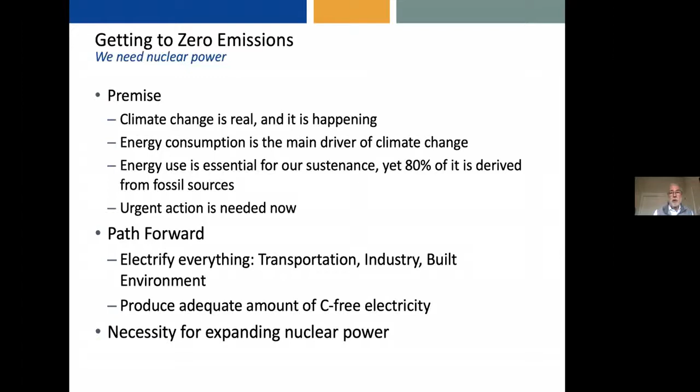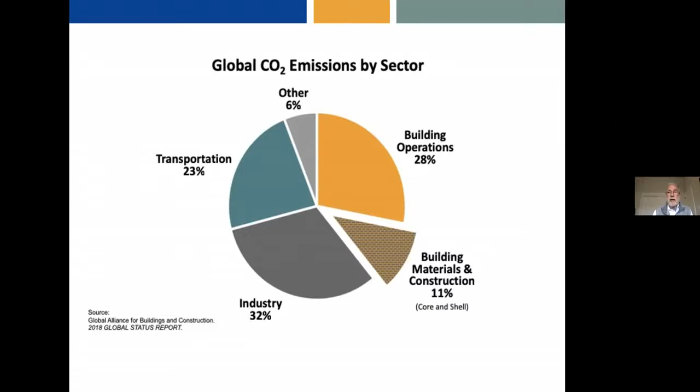And by the time you get to that, the per capita energy consumption at the country level has to be the equivalent of about 1,000 gallons of oil per year. This is for all energy, not just the gasoline for driving cars. I've taken the primary energy used in any country and expressed it in gallons of oil equivalent on an individual basis. That made a little more sense to me. You can find more about it in my other works. I'll talk about that. So that's what we want to get to.

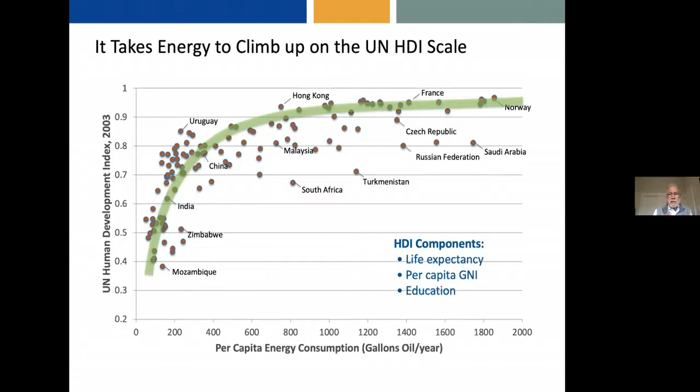So let's estimate what the energy requirement would be by mid-century. Let's assume for this analysis a population of 9 billion people. And if the desired per capita energy consumption to ensure an HDI of about 0.9 is 1,000 gallons of oil equivalent per year, which is still about half the consumption of the US, comparable to that in Europe and Japan, it translates to about 9 trillion gallons. Or, for those of you who may have seen my other works, the cubic mile of oil, my other favorite unit, it's more than 8 cubic miles of oil worth of energy.

But we are talking about it going all electric, so I'm going to dispense with the gallons and cubic miles and go straight over to electrical units. So in an all electric scenario, we would take the 9 trillion gallons and then try to convert that into kilowatt hours. And I'm going to use the exergy part of it. And in that analysis, 1 gallon of oil is not equal to 40 kilowatt hours, but only 12 kilowatt hours. That means for 9 trillion gallons, I need about 108,000 terawatt hours. That's about 4.5 times the current global electricity production.

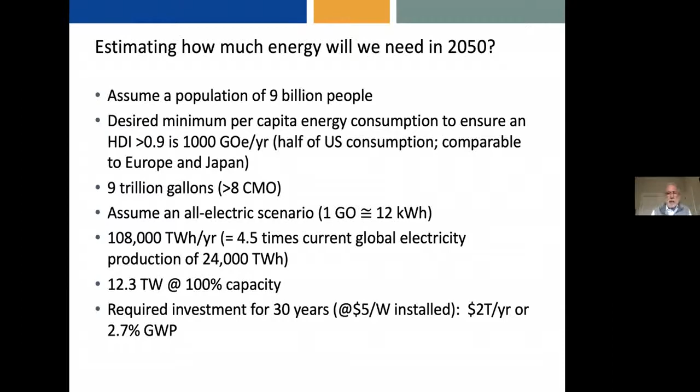But one of the big challenges for an all renewable scenario is that wind and solar are intermittent sources. The capacity factor, that means the time they are up and running, is less than 30%. And that increases the requirement for the installed capacity. So instead of installed capacity of 12 terawatts, now you're looking at between 30 and 40 terawatts. And second, these sources require a lot of materials in terms of iron, steel, concrete, glass, all kinds of basic raw materials. And when you multiply things to get to the installed capacity needed for the world, and I'm looking at a global scale here, it really strains the supply chains tremendously. I'll show you how much.

And then intermittency requires that there should be a commensurate amount of storage. We don't want storage just on a small scale, but on terawatt hour scale. This is currently being done mostly by spinning reserves of gas-fired turbines, because they can speed up very quickly. That's why they are desired, because the intermittent sources go up and down fairly quickly, and something has to be able to follow them fairly rapidly. So that's why it's gas turbines, but the gas turbines have CO2 emissions, and we want to get to zero.

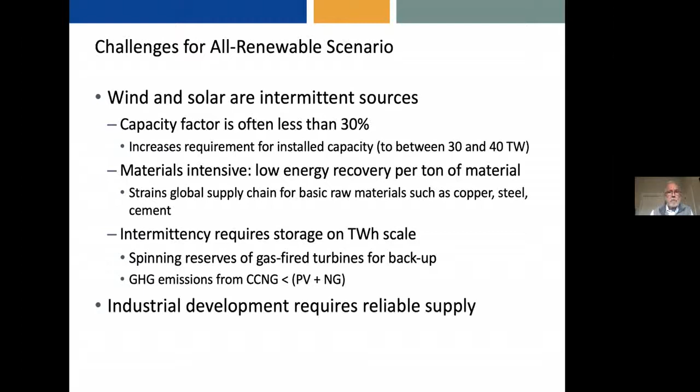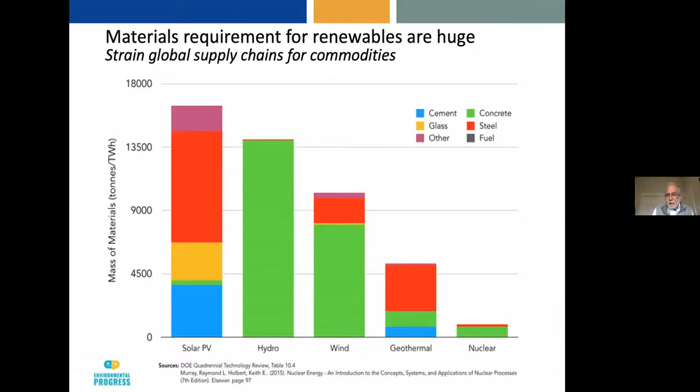Let's look at the amount of materials, as I mentioned. This is from the Department of Energy's Quadrennial Technology Review. It shows the mass of materials in metric tons per terawatt hour of energy produced by any of these systems. Solar photovoltaics, the totals come up to more than 15,000 metric tons per terawatt hour. Nuclear is actually a lot less. It's about 1/16 of that. Compared to wind, it's about 1/10 of that. So that's what happens.

And if you look at what it means, it's a steel requirement. If I consider just the lower end of the total terawatts installed, 30 terawatts for the world, then the amount of steel needed would be 25,000 million metric tons, or 25 billion metric tons, gigatons. If I'm going to do that in a 10-year ramp up, because we want to get to zero by 2030 or something, very quickly, that's still 2,500 million metric tons a year.

After that, because these have relatively short life cycles, barely about 20 years, that means about 5% of it has to be replaced every year, or 1,250 million metric tons every year. Now just for comparison's sake, the current steel production in the whole world is only 1,900 million metric tons. That was the latest figure I had from a couple of years ago. Last year was very low because of COVID.

So we are looking at about 2 gigatons of material production for steel, and that is being used for bridges, for automobiles, for a million other uses, but we need almost all of it to go into making just the PV systems.

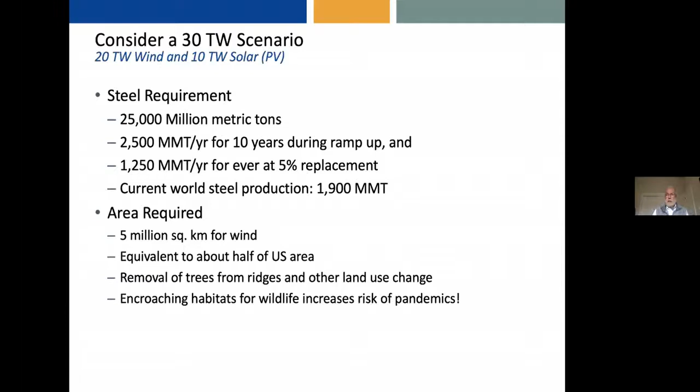When we are encroaching into these habitats, that also increases the risk of humans coming in contact with wild animals and the risk of pandemics. That's one of the things that happens, and we really want to be minimizing it. It's not just the installing, but also the digging for producing the iron, the steel and the glass, the mining that goes on, and that leads to a very high environmental footprint. And nuclear has a much lower environmental footprint. Battery storage is the other thing.

People say, well, I didn't talk about hydro. Hydro, you could, but there isn't that much hydro available. If you look at the total world system, how much is available and how many terawatt hours you can produce, you will have to install many more dams closer to the installations. Otherwise you have to have very long distance, high power transmission, which we don't have at the moment. It could be done, but it's not easy.

And I looked at the analysis by Jacobson where they talk about hydro as one of the components. I noticed in the US case, they were getting about 10 or 12 times the hydro capacity of the current fleet. So how did it get to be that? They said we'll just install more turbines but have the total flow the same. To me, that stretches credulity.

Let me take one example of a 30 terawatt system for the world, and 100 hours only. That's just a little over 4 days of storage. It's not a lot.

Just a couple of weeks ago, I had 4 days of power outage here because of an ice storm. Nowhere near like what happened in Texas, but here in Oregon. The slide in the beginning did show that I was in San Francisco. I moved. We're now in Oregon.

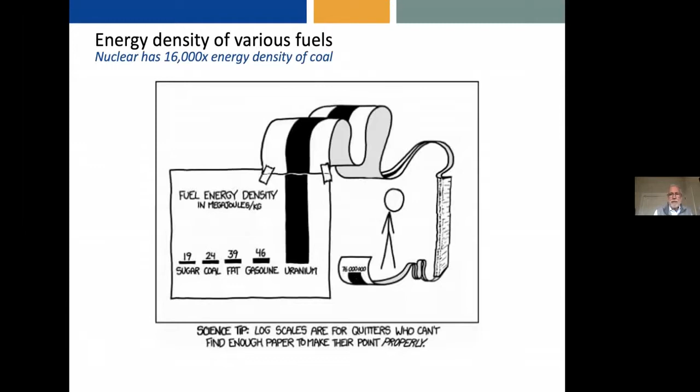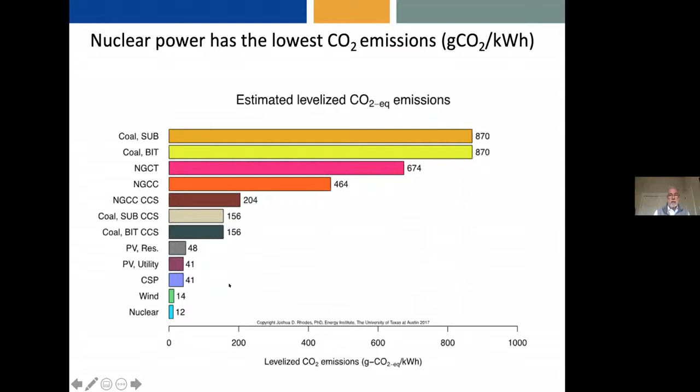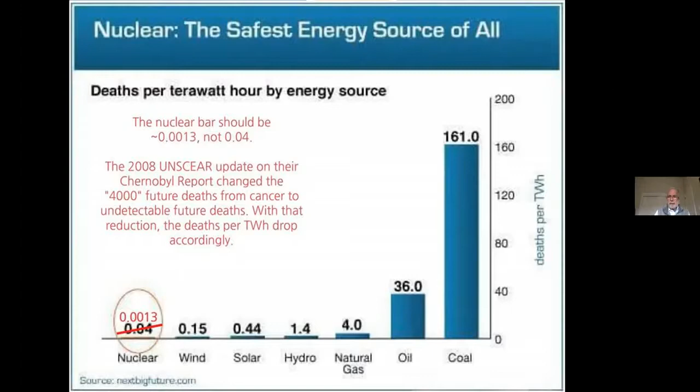In 2008, the UN body that looks at radiation damage came up with the finding that future deaths are going to be basically undetectable, and those were dropped. So now it is 0.0013 fatalities per terawatt hour. So when we turn off nuclear and put in natural gas or any other plants, we're actually increasing fatalities in the world. It's really an urgent task in front of us.

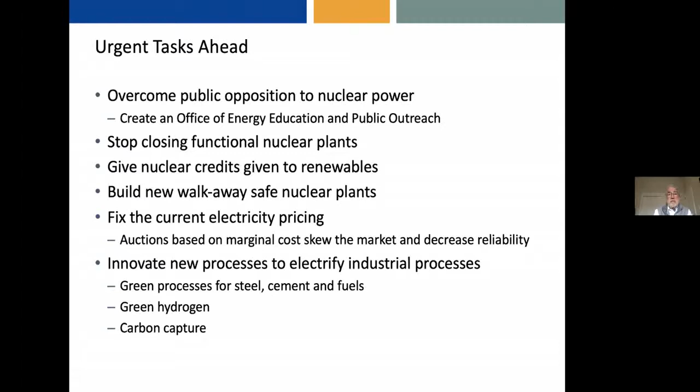It's all distributed between the state and others, and they say, okay, we'll just go with the cost, and when they do the auctions, certain things come down very low, and they are the only ones that get built, but nobody wants to build the reliability part of it. And there's a lot more innovation needed as we electrify everything: new processes for steel, cement, and fuels. Underlying those productions is the need for energy. It keeps on adding.

So I want to thank you for your attention. I hope I made my case here.